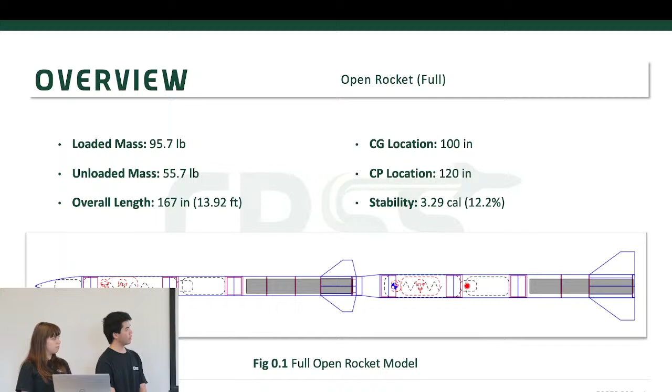Okay, here is our OpenRocket of the entire model combined. We have a loaded mass of about 95. Unloaded is about 55. It is almost 14 feet long. The center of gravity and center of pressure are over there. Stability is about 3.3 or 12%. And then let's look at just the sustainer. Loaded mass is only 43, unloaded 23. It's only about 7.4. This is roughly the size of the Encore rocket last year and has pretty similar specs to that. Stability is about 1.9, 10.8%.

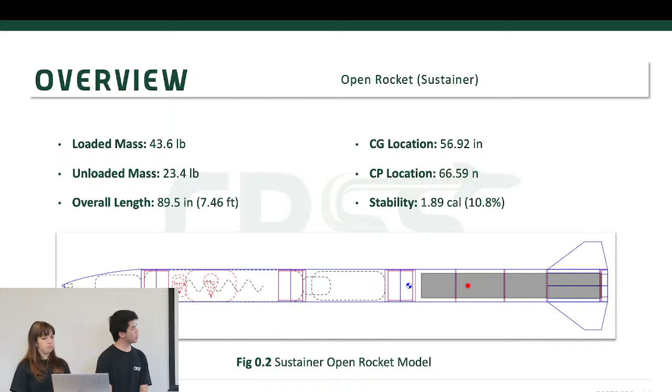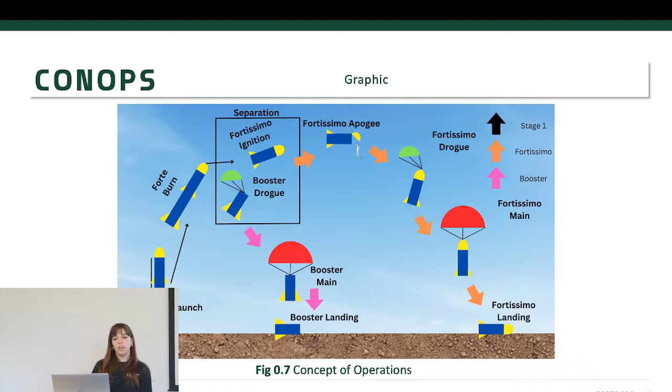This is our concept of operations. So we have several stages that I will discuss in more detail now. So first we have our launch phase. This will include integration of Forte onto the launch rail, the start of our video and data recording, and motor ignition and liftoff. Afterwards, the booster will burn till completion, and during this we will be receiving transmitted data on the ground. After that, phase 3 will be our separation. This is when our separation device will be activated and our booster and sustainer will separate.

After this, we will have two sequences happening at once. We'll have what happens with our booster and what happens with the sustainer. I'm going to first go over what happens to the booster. After it separates and the booster and sustainer drift apart, the booster will reach its apogee and coast to about 5,360 feet. Once this happens, the avionics will detect apogee and the drogue chute will be deployed.

After the booster reaches about 1,000 feet in altitude, the Tender Descenders will activate and deploy its main chute. And once this happens, the booster will land safely and start the GPS transmission so we can recover it after, and not walk through the desert aimlessly like we did last year.

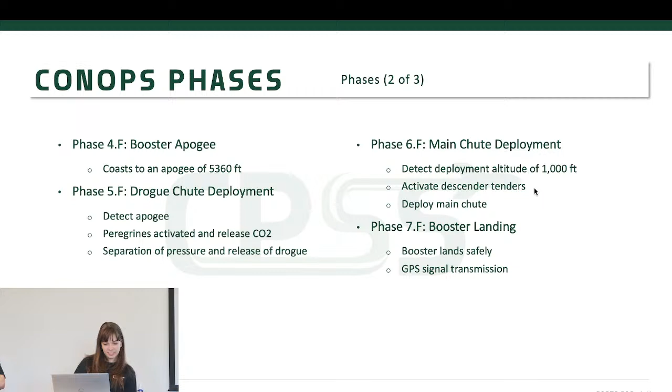And then while this is happening, we will have the sustainer also continuing its flight. It will have its motor ignition and burn, which will go till completion. While this is happening, we will still be receiving that transmitted data. After the motor burns, it will be in its coast phase until it reaches its apogee.

But right now we are predicting to be 20,682 feet. At this point, our water will deploy out of the nose cone as well. Once apogee is detected, the recovery will activate, the Peregrine will go off and shoot out the drogue chute. And then once again, when it reaches that 1,000 feet in altitude, the main chute will deploy before it lands on the ground and starts transmitting the GPS signal.

Okay, and here I'm going to talk about the requirements. These are all our top level requirements that are derived from the competition's list of requirements, and some of these, as you'll see later, are optional and get us extra points. So the competition is essentially a target apogee competition. You get more points if you are close to your apogee. It's a percentage of how close to your target you got. Our target is 20,000, and we've given it a 10% margin right now. So this is our primary objective.

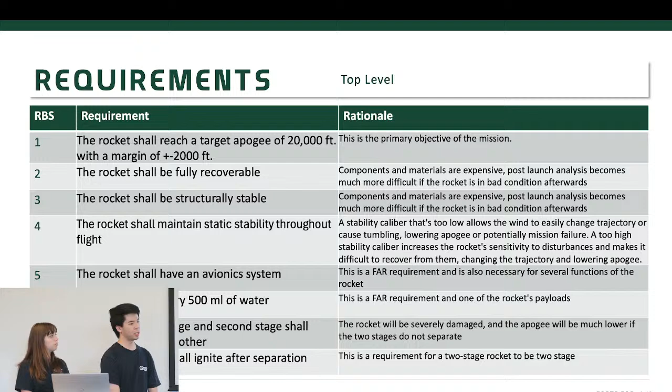Next requirement is that the rocket shall be fully recoverable, because we want to get scored. If your rocket is destroyed, you do not receive points. And we'll also destroy all of our stuff that we worked so hard on. We do not want that to happen. Going along with this is also the rocket shall be structurally stable. This is another requirement for the exact same reasons. We don't want to break our rockets.

Next, we have the rocket shall maintain static stability throughout the flight. This has to do with the stability caliber that was mentioned earlier, and we have set specific ranges for our sustainer and for our entire rocket that it's supposed to fall in, because too low is going to make it easier to push the rocket using wind or other effects. That'll cause it to not fly as high. Same way though, if the stability is too high, then it becomes more sensitive to disturbances, and it's difficult to change the trajectory once it's on a path that we don't want it to go on, then it's like game over.

Next, we have the rocket shall have an avionics system. This is another requirement from FAR, and it is also necessary for several of the functions of the rocket, including both our recovery systems and our separation. We need that to work as intended, and so we can get our GPS tracking telemetry.

We have the rocket shall carry 500 milliliters of water. This is a fairly new FAR requirement that we did last year, so we're confident we can do it again. But it is simply the water must deploy at or after apogee from the nose cone or another part of the rocket.

Next, we have the rocket's first stage and second stage shall separate from each other. This one is not necessarily a requirement from the competition, but we do get extra points like mentioned before. And we also have the second stage shall ignite after separation, and this is just a requirement for the two stage to not destroy itself. Yeah, that's about it for the requirements. Now we're going to move on to all the subsystems. I'm going to let Thomas and Bryant do the aerodynamics overview if there are no questions on the full scope so far.

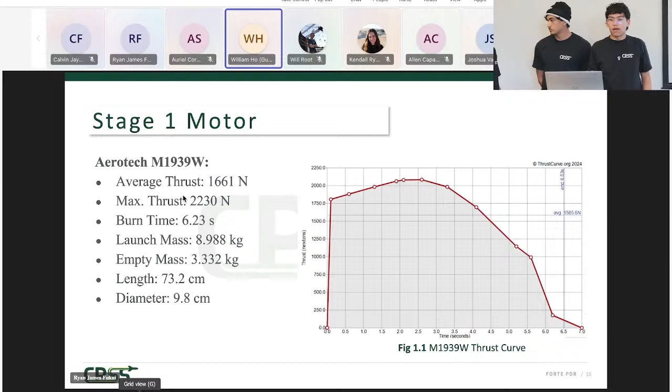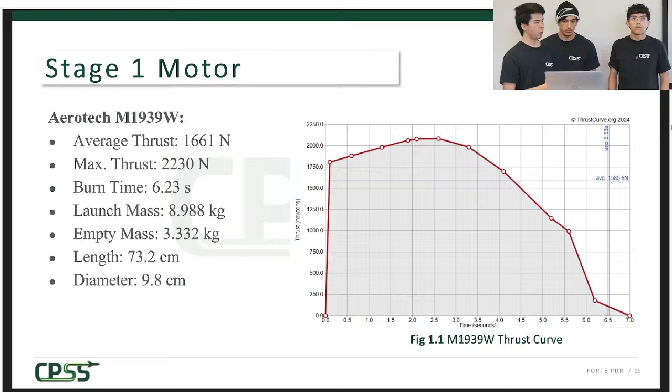Hey, do you guys have a project timeline and where you're currently at in the project, and I guess the next steps you'll immediately take after this design review? Yes, so each subsystem will have their own individual next steps. As for the project timeline, after PDR, we'll be preparing for CDR, which will be right when we get back from winter break, early January, second weekend. And then as soon as we're done with CDR, we're gonna allow subsystems to start ordering all their stuff.

And then by the end of January, hopefully we'll have all the materials we need. Up until May is all build season. In May we'll do another check-in with all the subsystems, a little launch readiness review, see where we're at before launch in June. The first weekend of June is always the launch date for the FAR competition. So that is our target. This is a one-year-long project, or we hope it's a one-year-long project. So yeah, that's our timeline.

There'll be a little bit about budget in each subsystem as well as an overview at the end. And that's about everything I have.

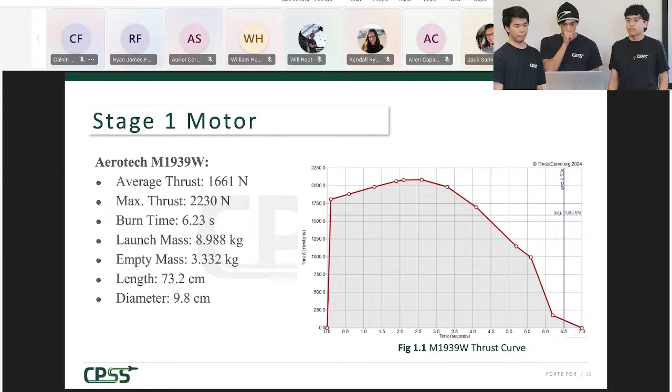Did that answer your question? Got it. Okay, thank you. Yes.

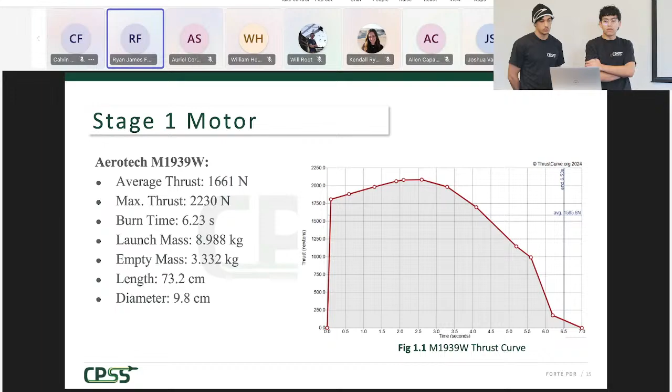Hi everyone, I'm Brian. This is Thomas. Let me start off with our motor selections. So for our stage 1 motor, which is our bottom stage, we have an Aerotech M-class motor. It has an average thrust of 1,661 newtons, a max thrust of 2,230 newtons, a burn time around 6 seconds. It's around 9 kilograms with an empty mass of around 3 kilograms, and then a length of 73 centimeters and diameter of 9.8 centimeters.

For our top stage, we also have another M-class motor from Aerotech. It has a higher average thrust of about 1,800 newtons, a max thrust of almost 4,000 newtons, which is also higher than our bottom stage. It has a shorter burn time of 4.5 seconds. The mass at launch would be 9 kilograms. The empty mass is around 3.5 kilograms. The length is similar, 75.1 centimeters, and it has the same diameter of 9.8 centimeters.

So moving into our flight simulations, we use three softwares to run our flight simulation: OpenRocket, RASAero II, and our own simulation within MATLAB. So firstly, we have our OpenRocket simulation. From here, we could see that our apogee was 20,682 feet. We hit a maximum velocity of around Mach 1.4, which is around 1,500 feet per second. We also have our respective acceleration values, and we hit apogee at around 39 seconds. For this simulation, it was just basic assumptions. We set the altitude for the launch site, which is around 600 meters, we inputted some wind speed, and then we used assumptions for temperature and atmospheric pressure.

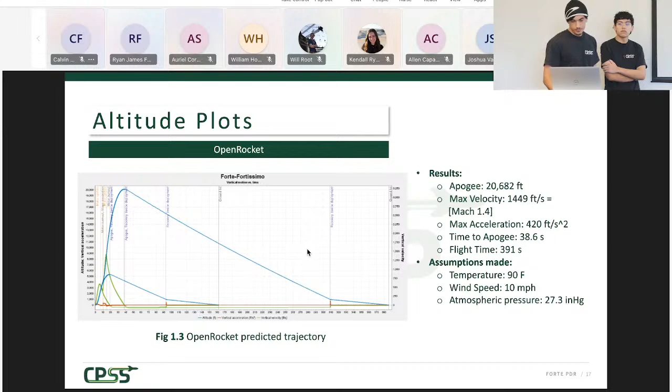So lastly, we have our MATLAB simulation. This plot is cropped. It doesn't have the recovery phase, just so it was easier to read. Here we have a slightly lower apogee of around 20,400 feet. It's good to note on this simulation, though, we had slightly lower expected velocity values. You can see our max velocity was actually Mach 1.3. That's something we're still trying to look into and figure out why that was the case. We also had a slightly faster time to apogee of around 37 seconds instead of 40 seconds.

For this specific model, we just used standard atmosphere, and this one had no disturbances, with 0 wind speed. Also, just a note on this plot, we used the drag data from RASAero. We're still looking into using the drag data from OpenRocket as well, to see how the two compare. Yeah.

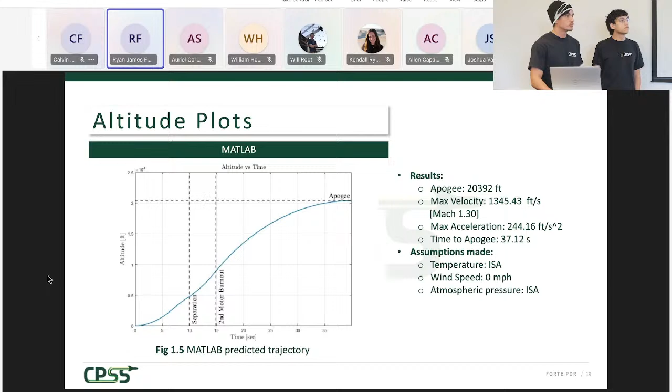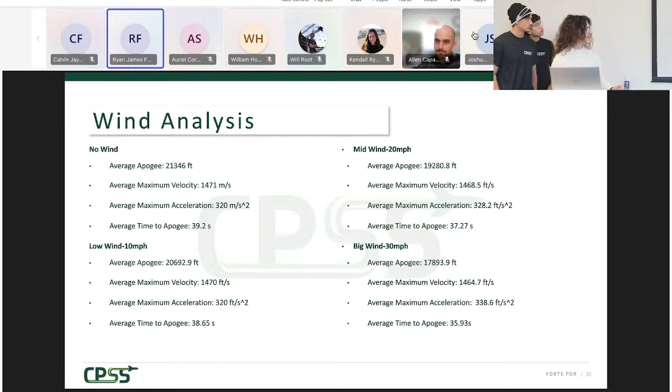Okay. Hello, I'm Juan. I'll be talking about wind analysis really quick. So, we've had a lot of updates to our OpenRocket in the past 24 hours. So we have no wind, 10-mile-per-hour wind, 20-mile-per-hour wind, and 30-mile-per-hour wind as kind of our frame of references for this wind analysis, and it also has a deviation of 2 to 3 miles, so it's in that range for each.

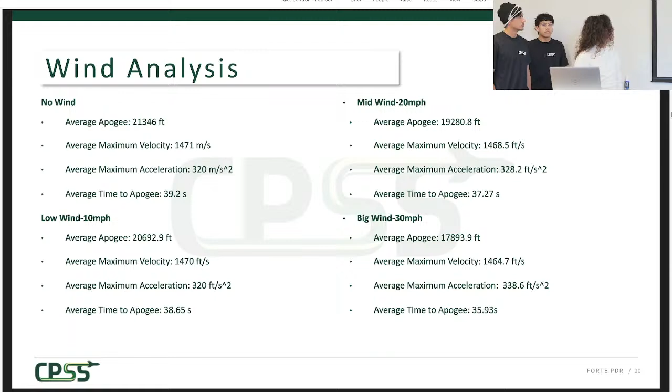So for no wind, we see that we hit 21,340 feet, which is very much within where we want to be. Low wind, we're still in that kind of range of 20,700. And then our 20-mile-per-hour wind and 30-mile-per-hour wind, we start to see that it gets a little dicey, especially with our 30-mile-per-hour wind. So yeah, some things to take into consideration that we get from this is, if a wind hits a certain speed, do we want to call it there?

Our safety limits on wind speed. Oh, I should know that off the top of my head, but I don't. I feel like it's, do you know? 15, 20 miles an hour, right? Somewhere in there. Okay. We launched at about 20 miles per hour last year. Yeah, it was pretty windy last year. And those are based on past years as far as weather. So we don't expect to launch in 30 miles per hour conditions. We just want to consider it anyway.

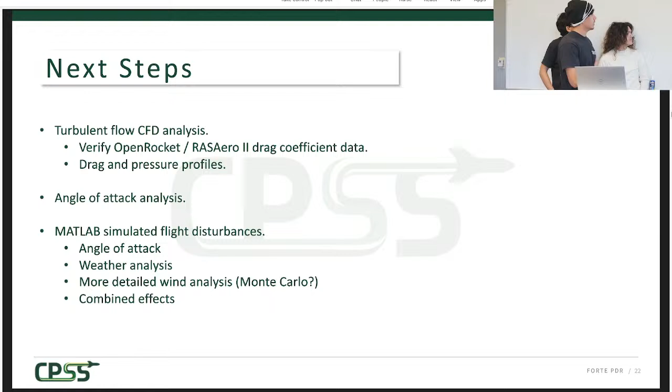So our current next steps, we want to have an in-depth CFD analysis to compare the drag coefficient data from OpenRocket and RASAero. We also want to get some drag and pressure profiles, primarily for the transition piece, which would be really nice data to have. And within OpenRocket and RASAero, we could do angle of attack analyses. And with our MATLAB simulation model, there's actually no disturbances, so we'd like to potentially add those and compare them to both OpenRocket and RASAero.

And then we'll be moving into the airframe design, and Connor's going to come up and talk a little bit about that. But before we move on, are there any questions about our aerodynamics section? Yeah, I have a few questions. Oh, is someone asking in real life? Yeah. Could you repeat the real life questions just so we can hear them too? Yeah. I was gonna ask about the...

Yeah, separation section. There is a separation section. It's mainly focused on the interface. As for the aerodynamic concerns, one of the next steps is looking more into the motor delay in between separation and making sure that works with our models, because we chose a 3-second one. We were working with OpenRocket and designing to apogee, and then we have to troubleshoot and make sure that still works physically. Do you have anything else about that?

Are you guys looking at getting documentation on the Ajax rocket? Yes, we did. That was one of our most referenced documents throughout the year. One of the things that was really interesting was that you were able to do a test motor fire before launch to get the actual burn time compared to what the spec sheet says. But we are concerned with budgets, and the motors are quite expensive now, so we are a little worried about not being able to get that important data.

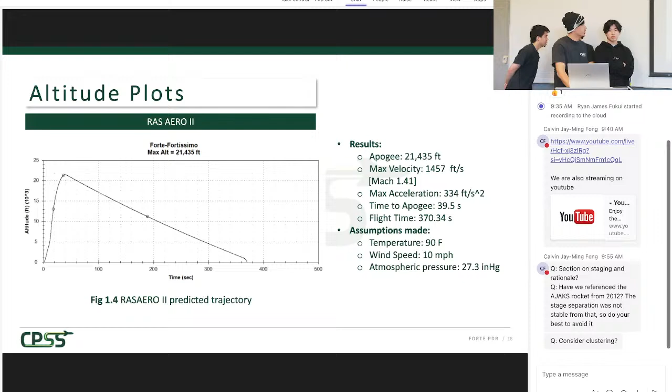In terms of RAS Aero, I'm pretty sure they have a good supersonic flight regime for modeling. But in terms of our MATLAB simulation, we don't really have anything along those lines. It's just simply the original equations of motion from the ODE. Yeah, that's also why I wanted to do more CFD analysis. I think that would help a lot with that supersonic region and getting more accurate drag data around the rocket.

Okay. And then, talking more about MATLAB and this simulation. What are the assumptions made there, and how did it change from last year to this year? The main thing that changed was previously we were only updating the density of the air from the standard atmosphere model. In this model, we're pulling density based on our Mach number now too, to try to gain more of that compressibility information. Also, because the rocket is varying diameter, we had to incorporate that as well because the areas would change.

And then, are you guys modeling the stage separation also? I assume you just decrease the mass for the upper portion. Yeah, obviously we updated the masses and all that throughout the simulation. So we have two burn ODEs now. Got it.

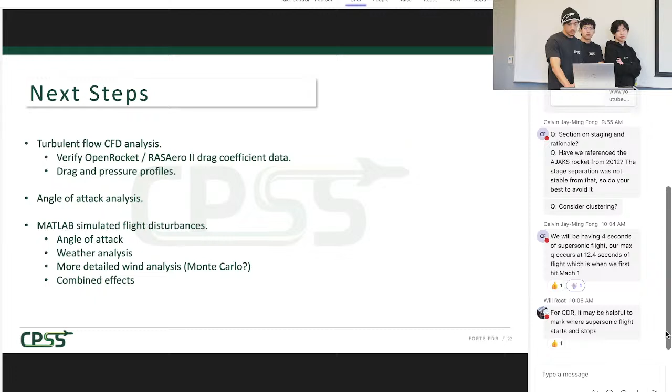Hey guys, it's Jack. Can you guys hear me? Yeah. Cool. So I just want to say great job. It's super exciting to see the two-stage rocket in the club now. So really good analysis so far. You guys did awesome. I just had a couple really brief feedback points.

So could you go back to the RASAero data? Okay, cool. So you simulated that with 10-mile-per-hour winds. At what altitude was that? Was that sea level or at launch altitude? 2,000 feet, yeah, launch altitude. Okay. And I saw you guys did the wind prediction as well. Could you go to that really quick too? Okay, cool. And is this at launch altitude winds, like surface level winds? Yes.

Okay. So the one thing that stood out to me a little bit is with a 20,000 foot apogee, you're going to get some pretty significant upper level wind shears, in my opinion. I've never been in a club where you guys have launched over 10,000 feet. I've only worked on, you know, Crescendo and other rockets that go up to 10K.

So my first thought is maybe you should do a little more research into how upper level winds affect the flight profile. I think it'd be worth looking into taking in some weather data from NOAA or other sources and trying to develop a very rudimentary wind model in order to better predict that apogee. So that's one thing with high altitude rocketry you should look into a little more. Might be worth more time in future work for the project. Nothing really stood out to me in terms of technical. Does that make sense to you guys?

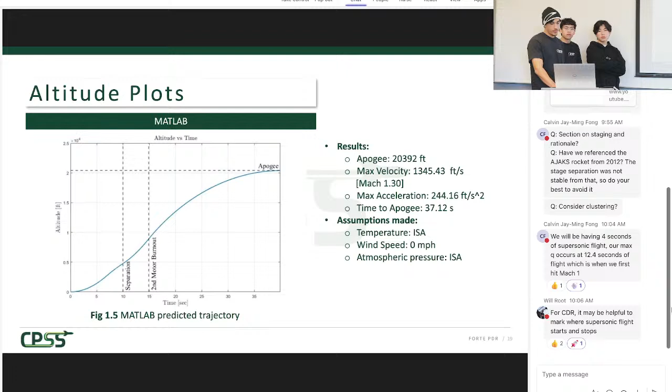Yeah. Okay, cool. And then could you go to the MATLAB apogee versus the OpenRocket apogee? What were the differences there? So MATLAB apogee was 20,392 feet, and our OpenRocket was 20,682. So MATLAB was a little bit lower. Okay, gotcha. That looks good.

That looks awesome. Going off of what Will said too, the optimization for the different motors, the first thing that stood out to me is my intuition was saying we should have a more powerful motor for the first stage and a less powerful one for the second stage. Going off of what he said, you might be able to optimize the design a little more that way.

So maybe do a little more research into, if we have a heavier motor for the first stage, you can save a lot of weight, especially on the coast phase. You'd be carrying a lot of dead weight, even though the motor's burned out. The bigger motors just have a higher dry weight, so that could help you and optimize even cost as well, like he said. So that could be worth looking into. And could you repeat, did you look into other alternative designs with a higher power motor for the first stage?

Yeah, so that was our original configuration. But when we were looking into higher power motors on the first stage, we ran into sourcing issues where we couldn't find specific configurations that were available. So then we moved into just using two of the same class. And also, as Ryan mentioned, they're cheaper. Also for our bottom stage, our main consideration was burn time. The one we chose had the longest burn time out of all the other N-class motors we've seen. So that was another consideration when picking those.

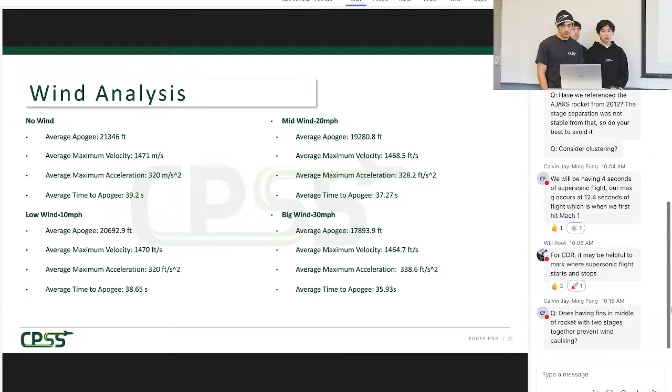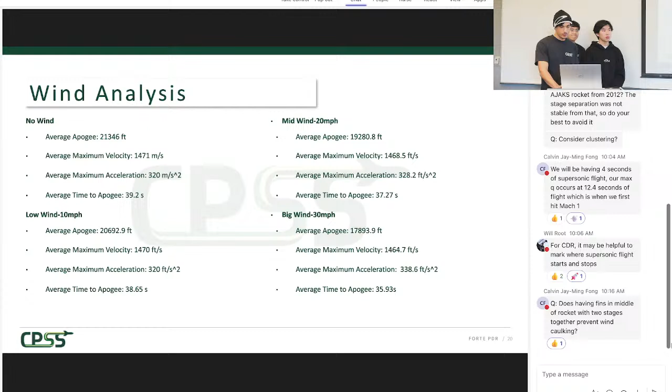I sent you a little snippet of what I did for a PSET the other day. I think you guys saw that, but yeah, I think it would be a good idea to make your own algorithm once again that can gauge the severity of wind cocking. And if you guys have any further questions, you can give me a personal call about the code that I sent. But yeah, I think it'd be good to develop something on your own once again and validate the results you guys are seeing from these softwares. Yeah, for sure. Any more questions?

I was just wondering one more thing real quick. Just out of curiosity, for this stage separation, did you all model a certain delay for that? Or how does that work? Yeah, in OpenRocket, all the simulations are modeled after a 3-second delay. Okay, and that's what you plan to use? Yeah, and separation occurs at burnout. Gotcha. Cool.

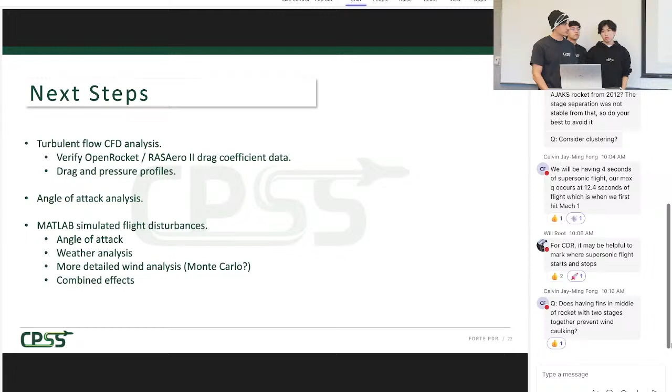Okay, so now we're just gonna move into the airframe design. So I'm Connor. I'm gonna be going over the airframe design, and this is the overall model of the rocket that you saw in one of the previous slides. For the nose cone, we're going to be using a Von Karman Haack series with a length of 13 inches and inner diameter of 5 inches, a wall thickness of about 0.08 inches, and a neck length of 2 inches. Something to note is that on the figures, there's an internal neck shown, but it's actually going to be an external neck.

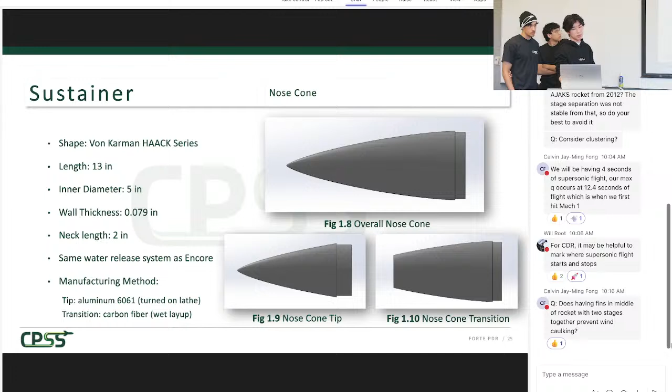And then it's going to be the same water release system as last year's rocket Encore, where once it reaches apogee, the rocket is gonna rotate and the tip's gonna separate from the transition and release the 500 milliliters of water. And then for manufacturing, the nose cone is going to be made with 6061 aluminum on a lathe, and the transition is going to be made with a carbon fiber layup. The question was, how hot is the nose cone tip going to get? There is analysis for that in the structures section. Yeah, so stay tuned.

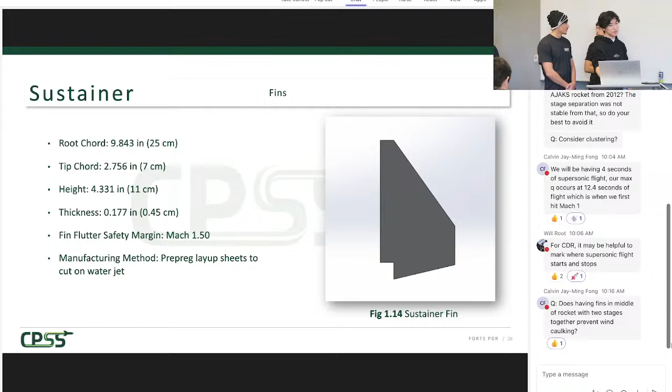For the stage transition, the length is going to be 6.6 inches. The forward inner diameter connecting the sustainer is going to be 5 inches. The aft inner diameter connecting the booster stage is going to be 6 inches with a wall thickness of 0.12. And then the neck lengths are going to be 2 inches on the recovery side and 1.6 inches on the separation side. And this is also going to be made with carbon fiber wet layups.

And then for the... That should be 6. Yeah.

For the booster body tubes, all of the inner diameter is gonna be 6 inches. The wall thickness is gonna be 0.12 inches, and the recovery and avionics tube are gonna have a length of 18 inches, and the motor tube's gonna have a length of 32.5 inches. And then they're gonna be manufactured the same way as the sustainer body tubes, where the recovery and motor tubes are gonna be made with carbon fiber prepreg, and the avionics is gonna be made with fiberglass wet layups.

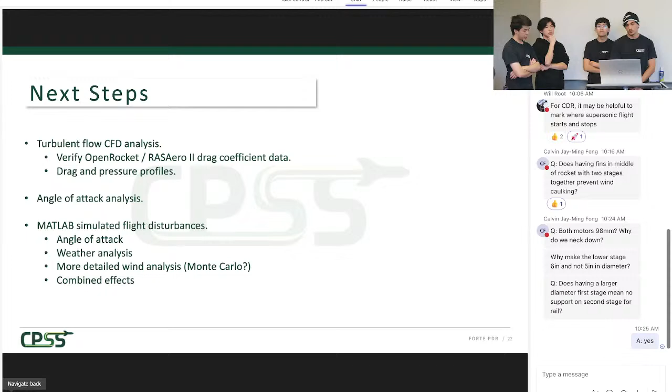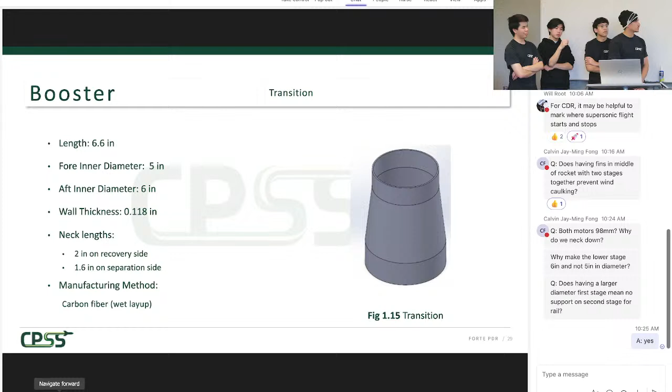Sorry, real quick. I had a question on the booster fin flutter Mach number. Looking at your graphs from the simulations, you might be exceeding that number at separation or leading up to separation. When I looked, Mach 0.7 was the max that the first stage would reach, because after they separate, that's when it accelerates and gets like Mach 1.5. Okay, I was just trying to read it off a graph. Sorry, it was a little unclear in the picture. That was just a concern based on what I saw, wanted to check. Yeah, thank you. Based on it, it was like 0.7.

The safety margin's about 15%. So the real Mach, like the fin flutter becomes a concern at like 1. So our safety margin of 0.86, and then with our fins only reaching like 0.7, we felt comfortable with that. Yeah, that sounds good.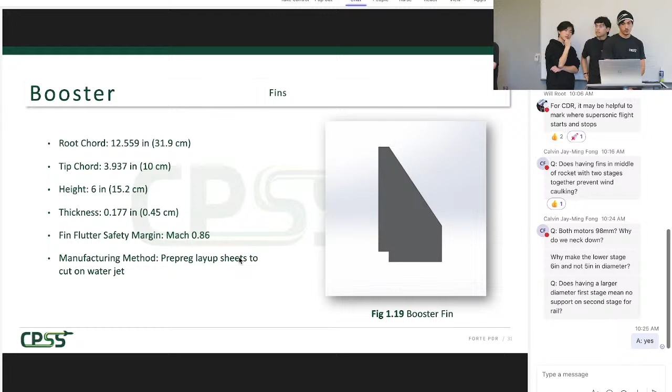Thank you for pointing out what the number is from the graph. Yes. Again, I was just doing my best to read it, and having you guys confirm what it is helps a lot.

Okay, now we're gonna be moving into structures, so, Kendall, or just Calvin. Kendall's online. Oh, okay. Yeah. Calvin's coming up. Thanks, aerodynamics. Hi guys, I'm Calvin. Kendall is my co-lead and she is online right now. She couldn't make it in person, but we will be going through some structure stuff.

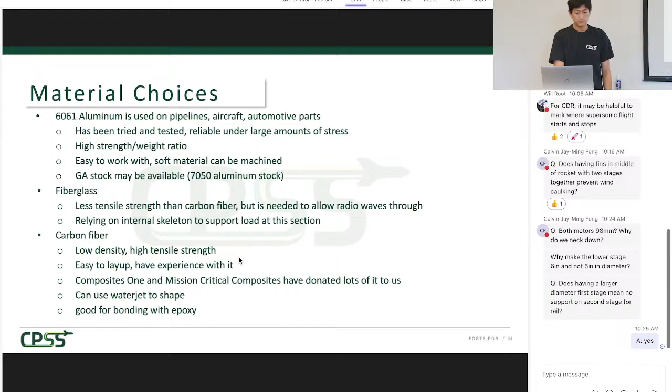So first off, general materials overview, we're using 6061 aluminum. That's what we've been using in the past. It's reliable and easily manufacturable, which is what we care the most about because we will be making our parts from scratch. Also, there may be some 7050 aluminum stock that we have in the shops. That would be very helpful for us, and we will talk about that more later because aluminum is expensive.

We will also be using fiberglass for our avionics body tubes because that's what's required for signals to get through. And at this point, our fiberglass is significantly less strong than carbon fiber. So for the second stage, we will have to rely on the internal skeleton to support that load in that section, and we will get into that as well. With our carbon fiber, there's a lot of pros, not a lot of cons. And now that we've been able to water jet the past couple years, it makes it a lot easier for us to make pretty precise shapes out of carbon fiber, as opposed to sloppy layups that might happen. So yeah.

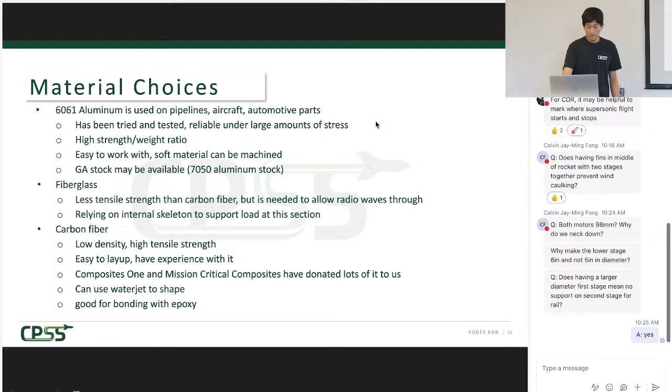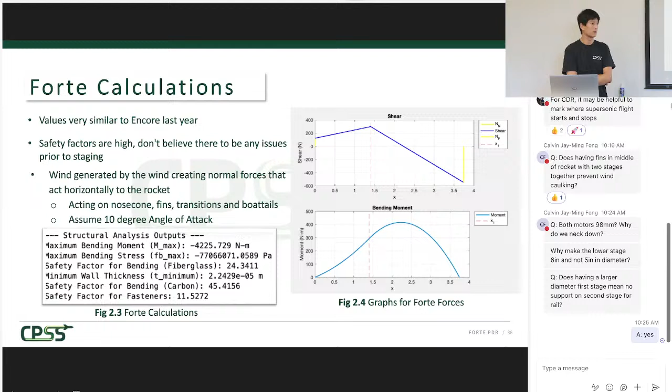I mean, factor 12 is still pretty high, like, what is the margin of error on load, what's driving your low confidence in this thing? I think safety factor of 12 and 6 is still very high. Oh, sorry. The question was what's driving our concern, because our safety factors still look pretty high on our calculations, and that's not taking into account carbon fiber at supersonic speeds. And we know carbon fiber can flutter at high speeds, so we're worried about the structural integrity of that when it's going Mach 1, because we haven't sent our carbon fiber anything past Mach 0.9.

I'd also like to add that these safety factors are specifically for bending moments, and we still have a lot of other significant calculations on the forces on the body tubes. This is just accounting for its bending moment and not other factors yet. Yeah, are you planning on doing some sort of combined loads analysis, before CDR? Yeah. Okay. These were just initial numbers that we wanted to get first, especially because our rocket is so tall this year.

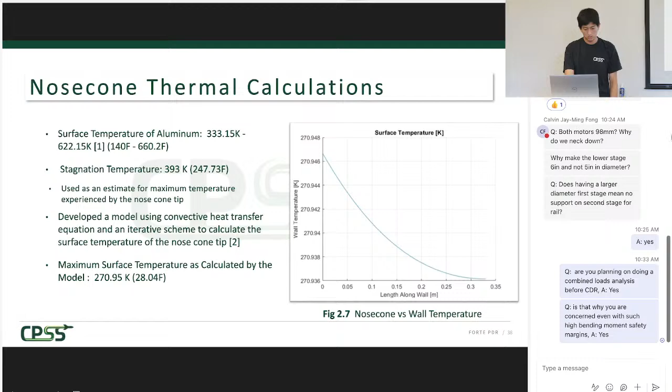Ajax, thank you, Calvin. And so just quick clarification here, this is like stringers on the inside of your airframe. This is not a separate structure. So will they be bonded into the airframe? Or how are these rods going to work? Are they going to be like a skin and stringer type analysis, or? Here, I'll go to the next slide. I think that might help clarify.

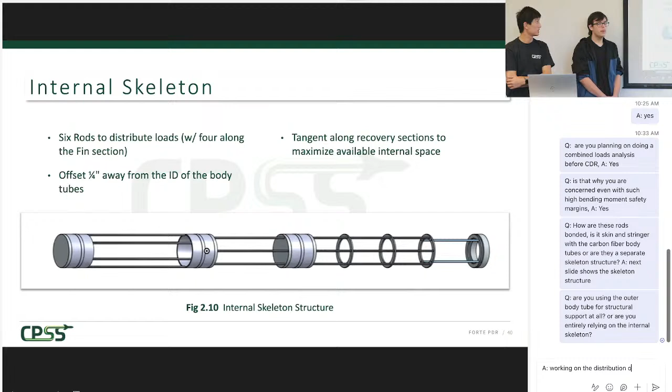Yeah, so for most of the skeleton, we're using 6 rods along the motor section here and the avionics section here, but we had to go down to 4 down here because of the space required for the fins. And those are all offset about a 1/4 inch away from the actual body tube. And the one exception of that is the recovery.

Oh, sorry. Sorry, tech issue. The exception of that is the recovery section because we are going supersonic. We're trying to give recovery as much space for the parachute as possible. So those are actually going to be tangent and secured, partially with epoxy, to the actual body tube.

Another question here is, where is the load from the motor actually being translated into the airframe? Is that going to be at the aft enclosure, or is the load going through the forward enclosure on the airframe? I am not sure, being honest. You said the load from the motor? Yeah, so where's the actual thrust from the motor reacted on the airframe?

Typically it's been just on our bottom bulkhead, and then by attaching those rods to these centering rings, we're hoping it will get translated upwards as well. But at the same time, we're worried about the forces coming down on the rocket because the drag forces will be very high. And to add to that, the blue tube holding the motor casing is going to be epoxied to the centering ring. So it's mainly the centering rings and that bulkhead that are taking that force.

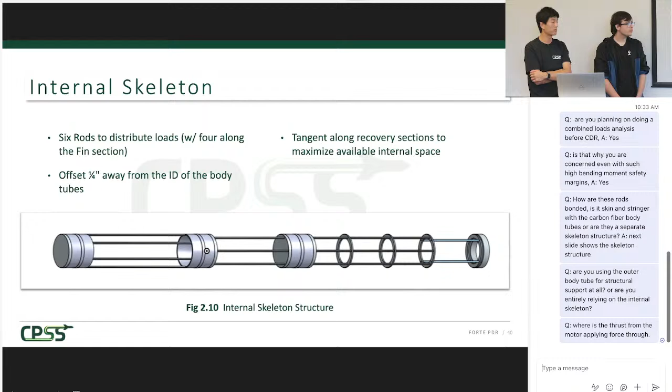All right, so just to go a little bit deeper into the centering itself, I already mentioned we're going to go to 4 rods for the sections. The rings are about 7.5 inches apart, and we have the separation plate here, which is also going to be our motor retention plate. And this ring right here is the one that's going to transition between 6 and 4, although we're looking into potentially changing that.

Just to clarify a little more on the transition to the 4 rods, we did that because we're going to have 4 fins, and we have concerns about our fins flying off because there's very little room between the exterior of the body tube and the motor mount tube. So by having these rods align with the fins, we're going to find ways to either epoxy the fins to the rods or have a more secure bolt-type attachment to secure the fins to the rods themselves. We think that's going to help our fins structurally as well.

Did you consider doing a fin can for the bottom section instead of having them go through, either by laying them up with the actual body tube section or locking them into the body tube section somehow? In terms of our fin retention, that is our next step for CDR. We've considered a few ideas, but we're still uncertain which direction we want to go.

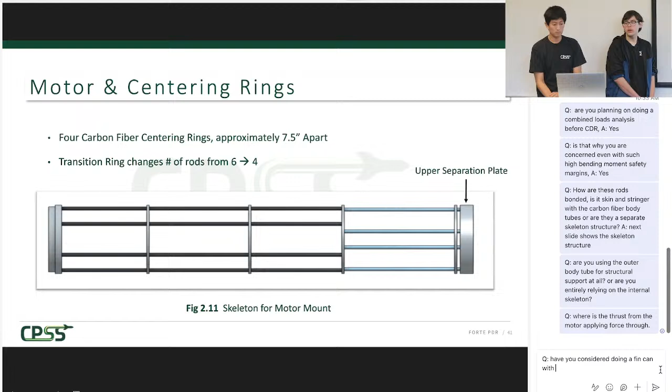This is bugging. Yeah.

Did you consider any other materials like Delrin, plastics or phenolics, instead of aluminum, to cut down on cost? We did not, but that's definitely something we should consider. Also, Delrin's probably a lot lighter than aluminum, right? So that'll help. Do we know how to work with that stuff? We know how to do all the aluminum. We've done acrylics for an avionics section in the past for Crescendo. Water jetting worked. Other plastics can be laser cut a lot easier. Delrin comes in sheet, that's what makes it really good for applications like this.

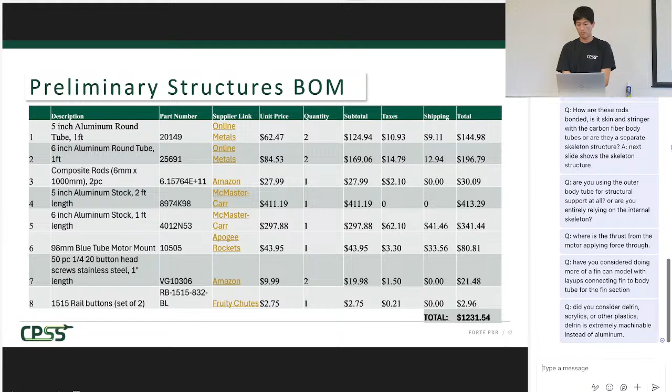Yeah. Well, first, that was not the end. There was more: a risks and concerns section and next steps. And then a whole section on all our different testing at the very end. But I'll let Calvin get back to it. Yeah, so we have some next steps too. Sorry, I totally forgot about those.

So yeah, as far as risks and concerns, from last year, we still haven't figured out a good way to get our holes 90 degrees apart on our couplers and bulkheads. So that's been an issue again. We used the 90-degree offset on the mill clamp and it wasn't 90 degrees. So finding a good way to do that, maybe just 3D printing out a jig.

The even distribution of our carbon fiber rods is going to be important because we are kind of worried about that 6 millimeter diameter, and there's no way that we can account for the rods to take 100% of that load if they had to. So making sure that the rods are evenly spaced, even in length as well, is going to be important for us.

Safety factor of our internal skeleton, we don't currently have one. Our safety factor was just assuming that we have max velocity and max acceleration at the same time, which isn't going to happen. Testing the strength of the internal skeleton, and then the natural frequency of our fins, because those will definitely flutter, and fin retention, which we mentioned, and budget as well, because we are running at a high budget right now.

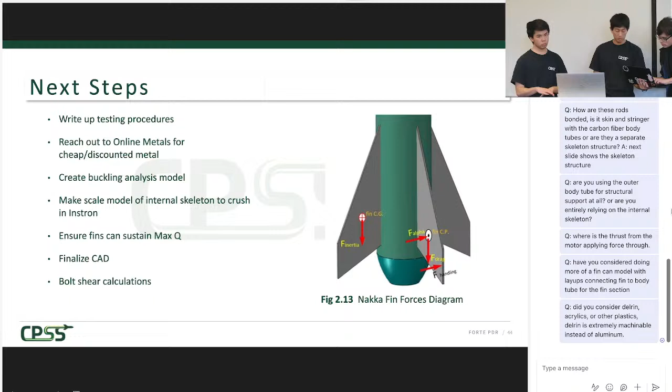Got it. And sorry, so you wrap it around the outside, and then between the mandrel and the inside part? Sorry, what was that? The inside release film, is that what you're talking about? It still does need release film on the inside. It's just that now we only need one release film each layup instead of two. I see. And you're going to use the release film you already have? Yes, or source more. I don't think we can use the quote unquote crunchy green one, or actually it might still be enough pressure, but we'd have to check.

We're going to do testing on that because we haven't used the tape before, so we'll do test parts before we actually try. But the plan is to use the release film we already have or try to get more donated. We did get some donated at the end of last year, but I'm not sure if it's perforated or unperforated. If it was perforated, we would not be able to use it. It should be unperforated, but when I looked, it didn't look unperforated, so they might have sent us the wrong one. We still have to look into that. Got it. Does that answer it? Yes. Thank you.

Will, did you also see we have the weight input in the chat? Got it. Okay. Ethics.

Oh. Yeah. We're gonna be starting, so quiet, please, or whisper at least.

Sorry, Metztli, go ahead. Okay, hi, I'm Metztli. I'll be talking about the recovery system. So first and foremost, I just want to talk about why I'm kind of just reusing the recovery design from last year and the year before. So it's the same recovery system we use for Encore and Crescendo. And there's like three main reasons why I decided to do this.

First and foremost is cost has been a really big issue this year. If we reuse the same design, we have a lot of reusable parts we can use, so it'll save a lot on costs. Second of all, it's a pretty reliable system at this point. We've used it 2 years in a row pretty reliably, and in a rocket where there's a lot of unknowns because we've never done a two-stage before, it's pretty important to be able to mitigate a lot of things that can go wrong. And if we're using something we're familiar with, then things are less likely to go awry.

And finally, it was just really easy to adapt from a single stage rocket, which is what we've been doing, to a two-stage rocket. So there wasn't really any concerns about it being difficult to integrate into a two-stage, and it just has minimal conflict with other systems. It's not a design that structures, separation, or avionics really has to worry too much about, because it's pretty easy to use.

So what would this design be? Well, on the booster stage, you can see right here, it has a drogue chute, a main chute and its bag, a bottom coupler, peregrines, which kind of stick through the bottom coupler into the avionics tube. There are tender descenders that connect with the shock cord to that bottom coupler. The body tube is the main part there. There's a shock cord, and the top coupler, which on the booster stage is right on top of that top coupler, will be the separation system. So our recovery system is essentially right under that separation system.

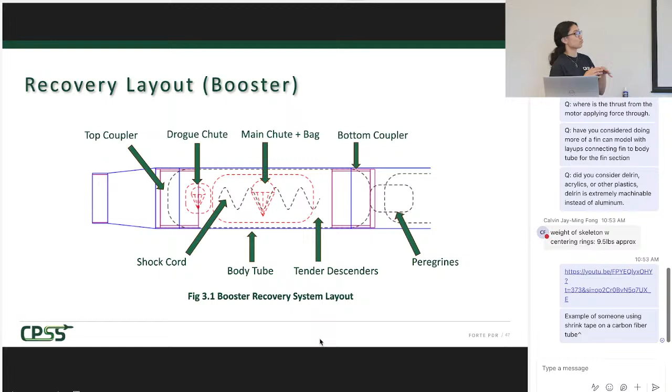And then for the sustainer stage, it's kind of the same thing, except the top coupler now has the nose cone on top of it. There's no other system or whole other rocket on top of it. Okay, this is the outer profile for both the booster and the sustainer. They both kind of look the same. Essentially, what we're working with is a pressure vessel that'll be created from a carbon fiber body tube and aluminum couplers. There's going to be an interference fit between the couplers, bulkheads, and body tube. In the booster stage, the transition rests on the lid of the pressure vessel, and in the sustainer stage, it's a nose cone on top of it.

There will be through holes on the bottom bulkheads. It's going to require 2 through holes, one for an eye bolt, which will be secured with a backing located in the center of each bulkhead, and this eye bolt is essentially what we're connecting the shock cord to. And then there's going to be one small hole that will allow wires to connect from avionics to our recovery parts, namely the tender descenders, because the tender descenders are not sticking through the bulkhead. It's only the peregrines that will be.

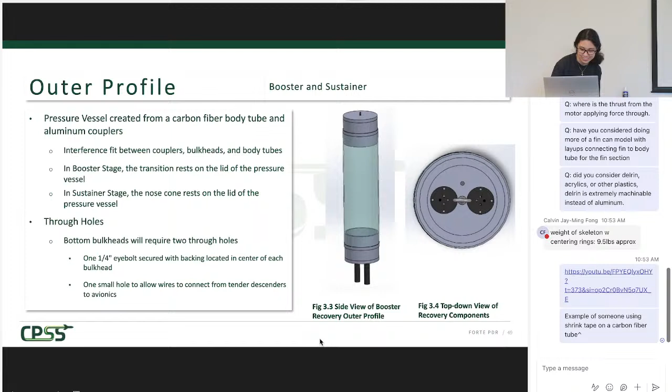Okay. So this is the first of our internal components. They're the CO2 peregrines. We'll be utilizing peregrines from Tinder Rocketry. They're going to be placed around the eye bolt, and they're going to be sticking through the bottom coupler. We're going to be using multiple for redundancy, probably 2. They're used to release the drogue chute at apogee.

Essentially, what will happen is when avionics senses apogee, the CO2 will fill the pressure vessel. They're going to send a signal that'll set off the black powder in that charge cup. If you can see it there, there's a charge cup and there's black powder in there. It'll set it off, and that'll puncture a hole in the CO2 canister, which will allow the CO2 to fill the pressure vessel, and the resulting pressure is going to pop off the top coupler and force out the drogue.

As for the tender descenders, we're also going to be using these from Tinder Rocketry. They're going to be placed in series and attached to the shock cord between the eye bolt and quick link. The point of these tender descenders is to keep the main chute in the body tube until we want it to release, because the main chute is not supposed to go off until like 1,000 feet after the drogue chute goes off. So again, we're going to be using 2 of them per stage for redundancy.

That's 4 tender descenders total. We already have 2 in the CPSS cage, so that saves us some money. Black powder within the tender descenders is going to cause the quick links to separate when we decide to release the main chute.

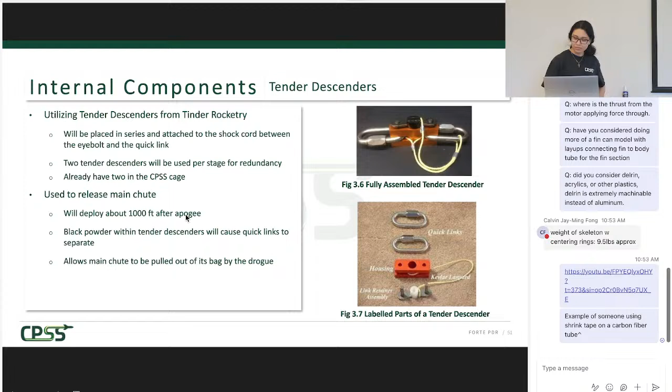Okay, and then this is just internal components related to altimeters and other related avionics. They're going to be using an egg timer that'll be connected with CO2 canisters and programmed to sense zero velocity, which is our apogee. They'll be connected to the tender descenders and programmed to sense when we're 1,000 feet off the ground, past apogee. And there's another avionics system they're making that'll just serve as the redundant system. We also have E-matches, which will be used to ignite the pyrotechnics, and those are going to connect from the tender descenders and peregrines to avionics.

Okay, so for some recovery calcs for the booster stage, we're going to be reusing our drogue chute and main parachute from last year. So that's a 36 diameter drogue chute and a 120 diameter main chute. We're also going to be reusing our shock cord, which is made of Kevlar. The landing velocity we calculated using an Apogee Rockets equation is about 14 feet per second, which is well below the 15 to 20 feet per second that's recommended for landing velocity. I tested it to see if the weight were to increase by about 50%, if our landing velocity would still be safe, and it would be around 17 to 18 feet per second.

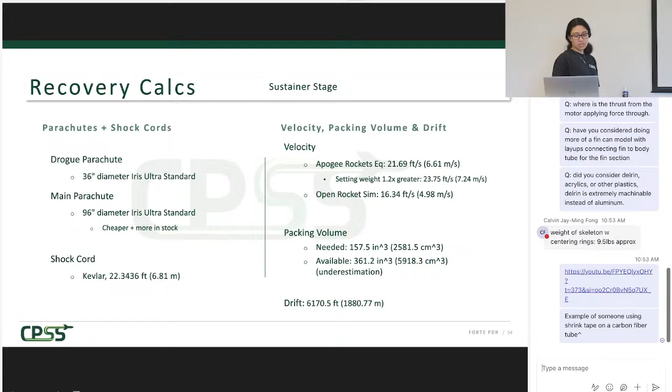And the OpenRocket simulation kind of agrees with these numbers, saying that our landing velocity would be about 14 feet per second. As for packing volume, we have more than enough space. We need like 260 cubic inches, and we have about double that amount. And then we also calculated drift. There is a drift of about 2,500 feet, which I think is pretty reasonable. That was assuming like 5 mile per hour winds. What's the apogee for the booster stage going to be? Yeah, around 5,000 feet, more or less.

Okay. For the sustainer stage, we will probably be using a 96 diameter main chute just because it is cheaper and it is more in stock. We're still going to be using the same kind of shock cord and the same kind of drogue chute. With the smaller parachute, we do have a slightly faster landing velocity. As you can see with the equation, we're getting about 21 feet per second, which is a little higher than the recommended 15 to 20, but not quite enough to be concerning. If the weight were to increase by about 20%, we'd be up at around 23 feet per second. The OpenRocket simulation seems to be giving a lot lower landing velocities, which is interesting. I'm not sure why. That might be a good or a bad thing, but it was giving around 16 feet per second.

In terms of packing volume, we're also still fine. We need like 160 cubic inches, and we have, again, almost double that. Drift is a lot higher because obviously the rocket is going up a lot higher. The drift here is about 6,000 feet. I will say it might be one of the benefits of having a slightly higher landing velocity. The rocket will not drift as far, because 6,000 feet is kind of a long distance to travel to recover the rocket.

Another question here, more for the structures team. It looks like you have double the volume that you need for the recovery system. Have you made that trade to shrink the volume of the recovery tubes to save some weight there? So not exactly yet. The initial design, when I was saying that we were not sure about the volume, that was before a change was made with the coupler bulkhead. The way those used to be, if you remember, the middle of the coupler was the wall of the pressure vessel. But now, since we're only using the same coupler design and the bulkhead's on the bottom, it gained 2 inches on top and 2 inches on bottom of volume space. So we could do that trade now to see if we can shrink that and see how that affects our weight and apogee. Yeah.

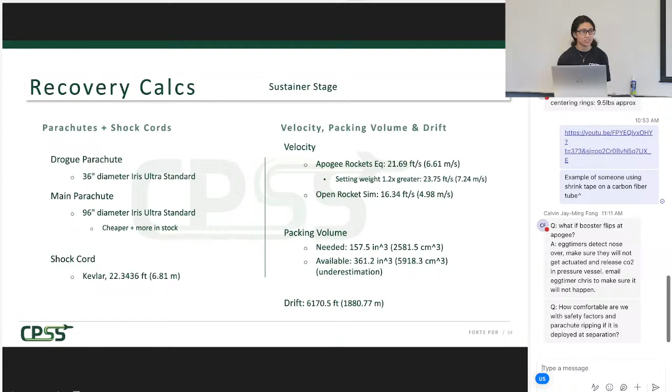Okay, for the people who probably couldn't hear that, the egg timer is based on apogee, not the velocity, so it should be 1 second after reaching apogee. Is that right? We should check whether the egg timer considers orientation in its consideration of altitude, in case it flips. I would expect not, because it's a barometer. Yeah, so I think we're okay. The egg timer is a barometer, so we do not need to worry about orientation being an issue and getting a false apogee or decreasing apogee, since it's based on pressure.

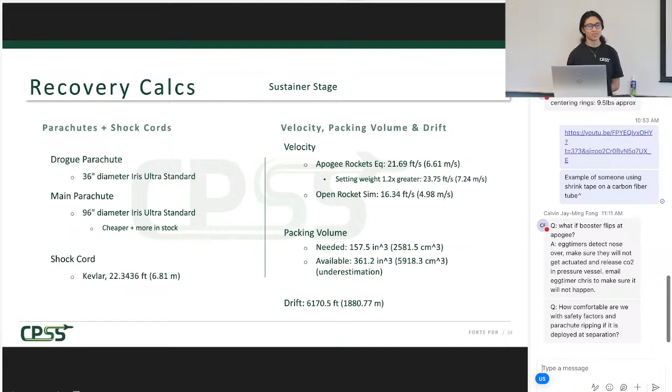We're gonna stick with Fruity Chutes and their ripstop nylon. Again, they're lightweight. Because it's ripstop, it'll resist tearing and abrasions better than just standard nylon parachutes. They're elastic, they'll absorb shock. And Fruity Chutes in particular have a very high coefficient of drag at like 2.2. So Fruity Chutes parachutes in particular are just a really good design and material to go with.

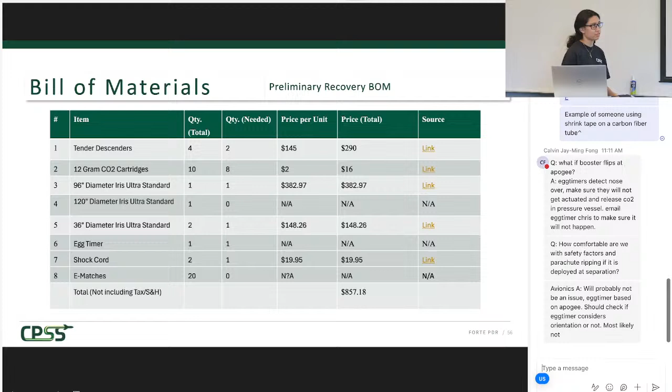All right, this is our bill of materials. Like I said, the whole point of reusing the recovery system from last year was to save on material costs. So you'll see on here there's a quantity total and then a quantity needed. For some of the stuff, we don't even have to buy it because we already have it in the cage. So the total cost, accounting for things we already have, is about $850.

The points of concern, like we were talking about earlier, the supersonic effects on parachutes are our biggest concern. Parachutes on supersonic rockets tend to have a higher tendency to rip, especially if something goes wrong. It's not going to be withstanding those forces at those high speeds. I'm not entirely sure if the tendency of parachutes to rip is caused by improperly timed deployment, or some weird stuff that has to do with the changes in air pressure or the forces that occur when you're going that fast. But we are gonna have to try to get more research on that. Hopefully it's just improperly timed parachute deployment, because if so, we can work around that.

Zippering's another slight issue. Again, if the recovery system deployment is improperly timed, then the Kevlar shock cord can do some major damage to our body tube. And this will be enhanced if it occurs during the sustainer stage specifically because of how fast it's going. And then there's just some slight concerns with integration.

I am a little worried still about how separation might impact the pressure vessel, just because separation is still being developed a bit, and it has all the rods and stuff, and it's right on top of us. And we just want to make sure there's no interference between the two.

And weight changes might also be a slight problem because, as you would recall, we're already going kind of fast for the landing velocity for the sustainer stage. And if that weight changes to be more than 20% higher, like 50% higher, for example, I'm not sure I'd be comfortable with the landing velocity. At that point, we'd have to start thinking about changing parachutes and readjusting how much space we need in the tube and all that stuff.

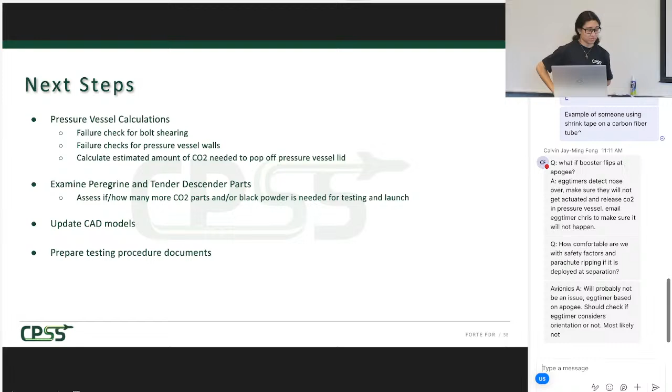Kind of a question both for avionics and for recovery. Have you thought of any contingency plans if either booster sep or stage sep, or nose cone sep, doesn't occur? Like, will your avionics know not to fire the second stage motor if you don't hit stage sep, or will you just blow a... Yeah, that's what I would be worried about too. If for some reason, like friction or something, stage sep doesn't happen, and what the consequence of it would be.

Would it be safer to blow a hole in the booster so that you could possibly recover the upper stage? So is that parachute sized for both? I believe so. I think the separation and the recovery are different systems, if I'm not mistaken. So the failure of the separation would not cause a direct failure of recovery, as long as we can sustain a hot fire separation of just blasting straight into our separation plate that will be talked about, which is one of our redundancies for separation.

It is held on right now by shear pins. It'll be talked about in just a moment. But yeah, it is essentially two different things that are happening. So the recovery would not be directly influenced by that, is the goal.

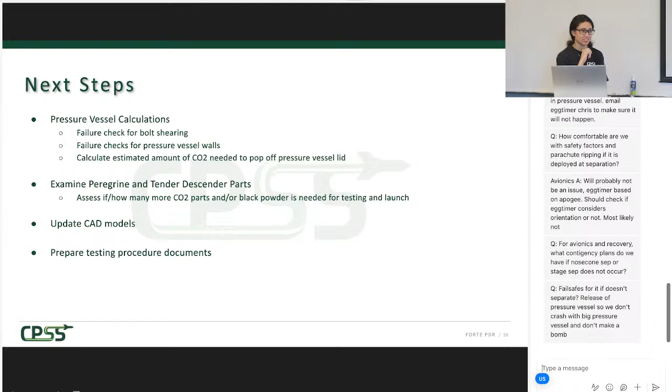We usually do drill some small holes in it. We have traditionally for the past few years. We also have that hole for the Tender Descenders, so some gas can escape from there as well. So hopefully that'll calm it down a little bit. And that can be a pretty simple calculation too. Yeah. If you have your starting pressure and a squared orifice, you can calculate if you want to bleed out all of your pressure in like 10 seconds or whatever of recovery. You can have them all empty.

The question was if we considered releasing pressure in the case of a ballistic recovery, so we are not dropping a pressure vessel from thousands of feet up. And the answer was that there are essentially holes that should hopefully allow the pressure to release, and we can do calculations to make sure that it will release by the time it reaches the ground.

Yes. Yes. Yes. Any intentions, like testing, to make sure that it is still suitable to be reused? Yeah. The exact shock cord, we can buy more. It might have been misleading, but we do buy more shock cord. It's just the parachutes are being reused, and we could do the same thing, make sure the parachutes are still good. Yeah, that is a good point to bring up. If you're reusing parts, make sure they're still in good condition, or that's not good.

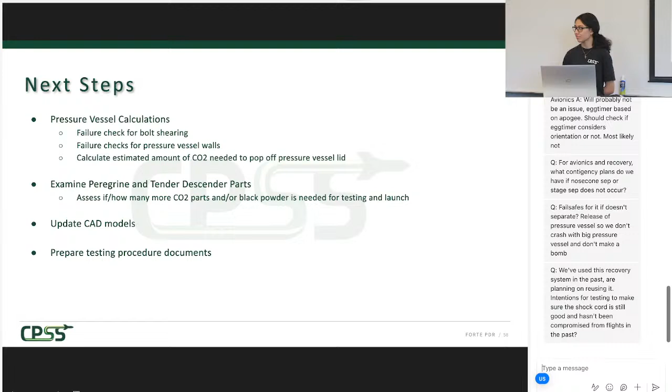Yeah, the questions and comments were about the state of our shock cord and recovery stuff and making sure that's still good, and also what the shelf life of the cords may be. And we believe that it's still within that shelf life, but if not, we can always buy more because it's relatively cheap compared to other stuff on the bill of materials. Okay, good. So next is separations.

So, hello, I'm Tianna, and I'm in charge of stage separation. I'll be walking you through the design process. Our main objective is to design a mechanism that separates the two stages in a reliable and controlled manner. For that reason, we decided that an explosive release would be the most reliable and realistic or feasible solution, with shear pins

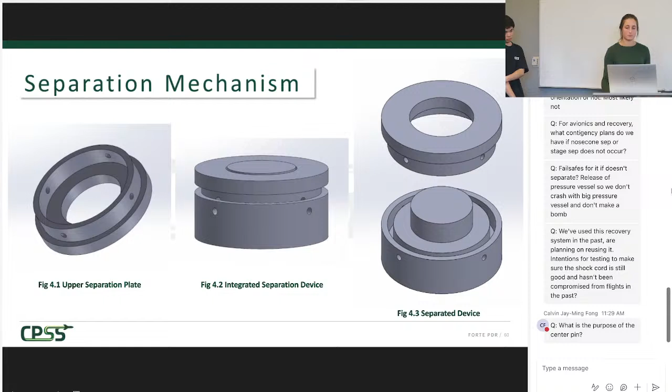Any more questions? And on to avionics. All right, I'm Jack Ryan, the avionics lead, and this is Spundin, who is the software lead for avionics as well. And yeah, we'll be talking about our avionics system.

So our main PCB that is going on the two-stage rocket will be the telemetry operations manager, or TOM for short. And TOM is basically meant to be a one-stop shop for all of your avionics needs. So it has all of your basic avionics sensors like your altimeters, IMUs, GPS, and it's meant to handle all of the readings, the filtering that you need to do, as well as communicate that down to ground station.

And it has a lot of power regulation on board too, so that you can provide it with a wide range of voltages. You can use pretty much any reasonable battery and it should be able to run. And it also has an additional third microcontroller that is left intentionally as a blank canvas to do whatever else you need it to do. And it has a lot of GPIO so that whatever mission it's needed on, it can accomplish that. So here's a little black box diagram of TOM.

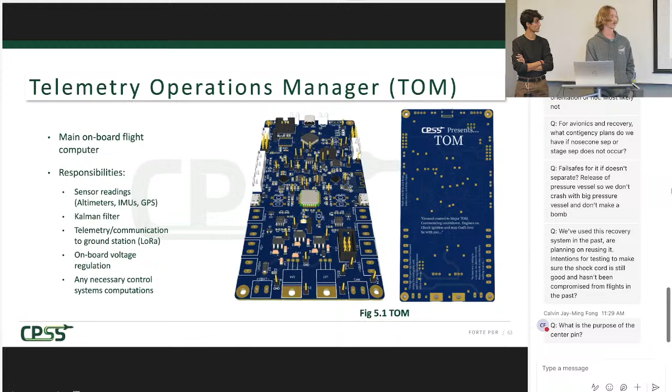Additionally, as you might be able to see on the board here, along the side we have a lot of connectors. We routed out a lot of the communication ports for the sensor microcontroller so that, in case the sensor fails or something on board doesn't work, we can always plug in another breakout board or an off-the-shelf component to replace it. So there's some I2C and UART ports available for backups.

And then in terms of sensor redundancies, we have, as I mentioned, 3 IMUs and 3 altimeters. The reason we like 3 is that we can take the median value rather than the average, because if we take the average value and then one of them fails and, for instance, starts reading zeros, then we divide our actual value by half. This was suggested last year to us at PDR, so we decided to run with it this year as well. And these values can be fed into a Kalman filter for increased accuracy.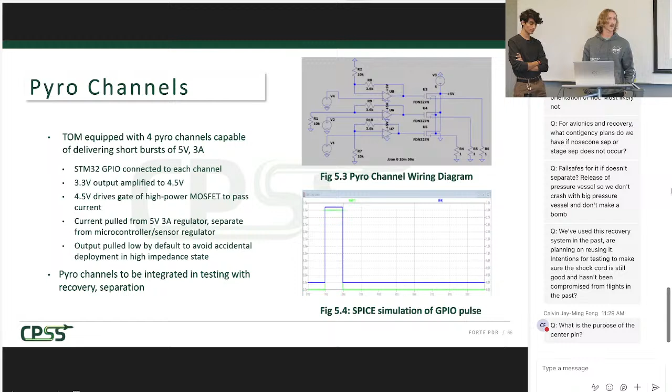So in terms of software, we're aiming for two major milestones. Milestone 1 is just our minimum viable product running on Tom. ESP32s support programming via the basic Arduino framework. So the goal will just be to get the onboard IMUs, altimeters, and the GPS functioning. And in the event that an SMD we expected to work isn't working, we'll use Tom's GPIO pins to drive breakout boards. We're aiming to transmit from the onboard LoRa module. Also, if our SMD components have some problems, we'll be able to use GPIO pins to transmit. And then the ground station is just receiving via a Raspberry Pi using a basic script printing out to a shell.

Milestone 2 is going to be more of a polished Zephyr system. As soon as we achieve milestone 1 and secure our minimum viable product for launch, we'll aim to move over to the Zephyr real-time operating system and clean things up a little bit. We'll find analogous libraries to the Arduino libraries that we use to run the basic sensors on the ESPs running the Arduino framework. Then we'll take other polishing steps, like accounting for data packetization, quality of service, and making this more of a product that we can take into future years. And then we'll start using OpenMCT or Foxglove Studio or some alternative to display ground station data in a more polished way.

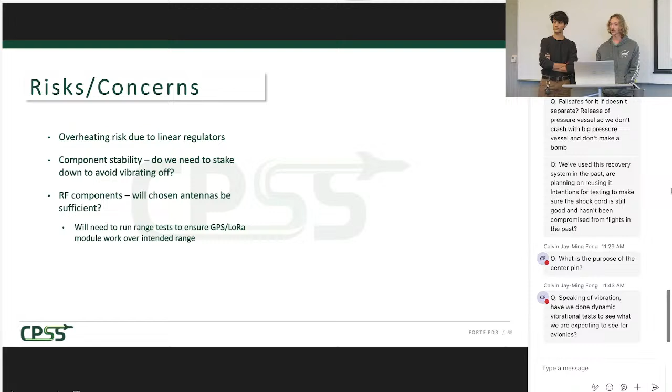Matthew. Speaking of vibration, it's more of a question for the structures team. Have you done any kind of dynamic analysis of the rocket and the dynamic environment that it's going to see, like what vibrational load you're going to be expecting, so the avionics team can design for that, or is that something you're going to look into? We did find out that we have a vibe table that we didn't know about, so we might try and see if we can get that working, or probably contact someone in the ME department if they have a vibe table. Yeah. That would be good.

One thing I forgot to mention as well is that the telemetry microcontroller is also equipped with Bluetooth. It's an ESP32, so it's meant for Bluetooth. It has an onboard 2.4 gigahertz antenna, and so if we need to communicate between the 2 stages, that's one way that we can do it without passing wires through something that's going to be separated.

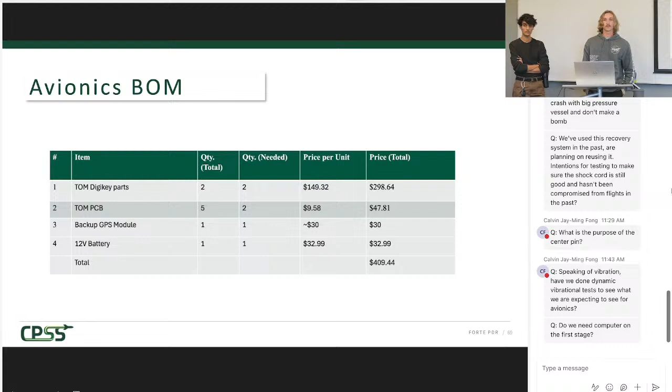I'd say more than half an hour. If it takes you a while to get a lock on the GPS on the ground, you might want an hour or two. I think he said half hour on the launch pad. Oh, sure, yeah. I think that's also what FAR gives you. Yes. All right. Okay, that's it from us.

Next up, we have testing. Hello, my name is Auriel. Because we're doing so many tests this year, we wanted to group them in a separate section at the end, so we can say what tests each subsystem is going to do. I'm going to be working very closely with each subsystem to develop their tests and then perform them, so they have a little bit more help, and so we can develop more procedures and get them checked.

So we have our composites testing. Our current composites are out of spec donated material, so we need to verify that these materials are going to withstand the loads during flight. We did this last year with our material after the freezer broke down, and it turns out they did not withstand the stresses anymore. So we had to get new material, which is why we now have out of spec material, but it is new and still works for us since those tolerances are so tight for companies and industry.

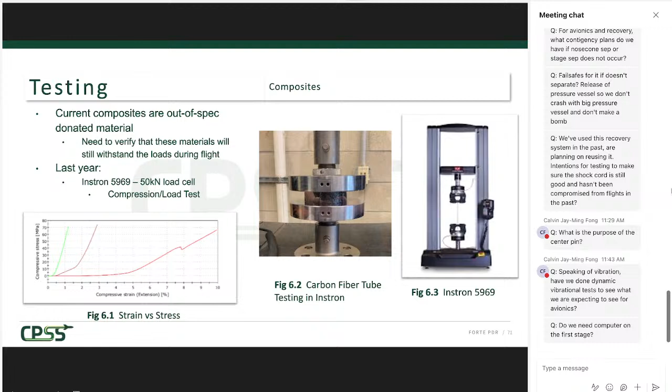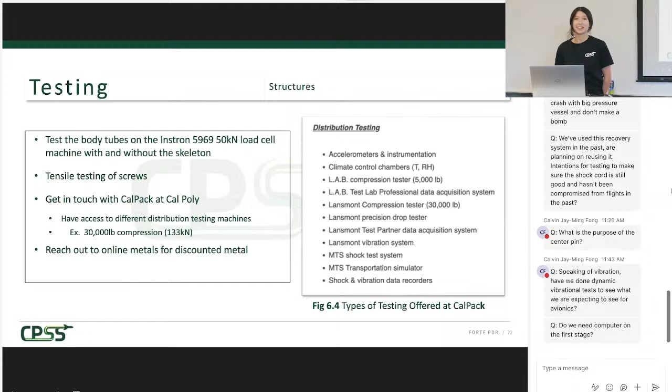We want to combine with the avionics system so that they're going to test their system while we're testing our system. This is going to be probably right near when we're going to launch, but probably like a month in advance, hopefully. So most of our stuff's going to be set up and manufactured at this point. It's really just going to be a big test of multiple systems.

And then we're also going to do tender descender testing, which is just ensuring that the quick links of the tender descenders successfully detach from the housing. This can also be used to teach other younger students, since a lot of us have done this before. But it's a cool test to watch, and it's just checking to make sure our tender descenders are still in good condition.

And so for our next steps, obviously we want to do safety procedures, and then brief everyone on black powder, because that's specific documentation that you need to learn.

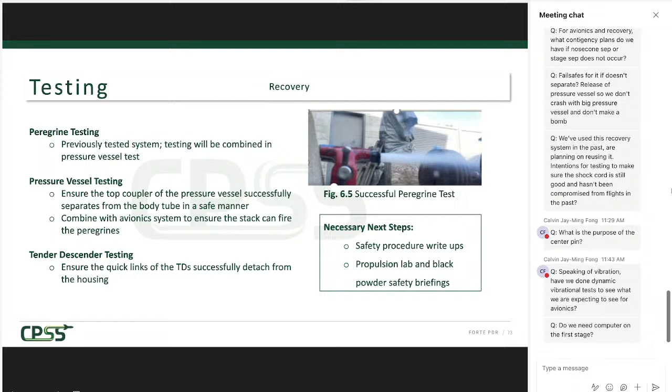So for separation, this is our biggest test and probably our most dangerous test for our 2-stage, because it's basically a ring of black powder. And we've never tested this much black powder probably in a while. I don't know about before COVID, but for our group, yeah. And we need to basically make sure that the separation system separates and does not fail. And we can't test our hot staging as our redundancy, because that's just going to be the motor, but we can test black powder easily in our Cal Poly propulsion lab.

So the test right now, what I'm thinking is just finding some way to secure the transition piece on the ground. That's going to be bolted into the separation with shear pins, and then all the pieces are going to be in there with the black powder. And then if the top just pops off, then we're good, successfully separated. Figuring out how to apply loads to that will also be something that we're looking into in the future. Yeah.

Okay. So for some next steps, we have to obtain more black powder if we want to make a ring of black powder. Cody has previously offered to get this for us somehow. But we're gonna work with him and Dr. DeTuris to ensure a safe test. Yeah.

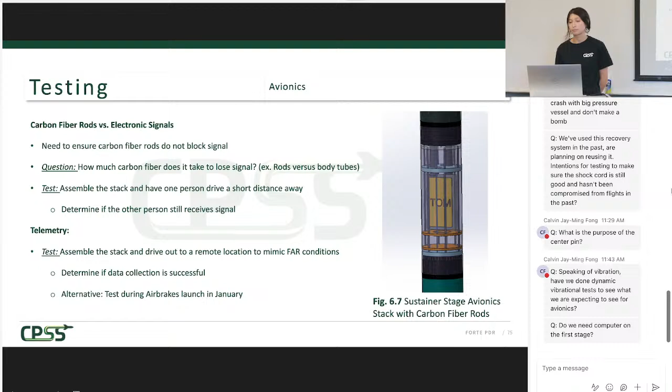So budgets, aerodynamics. When we were allotting the budget, I did not account for the fact that we did not have the casing for the motor for the upper one. So that budget was only the grain. The casing alone is another 1,000. That's what's causing that to be up. We're not exactly sure how to get around that, other than just sourcing from somewhere else who's not making us pay 1,000. Are you sure in the closet of curiosities, there's not any other motors? We checked, and apparently there was one that was the right size, but it was cut off. I don't know why that would have been done, but it is not usable in that state.

We were also looking for the little caps, because that would save us a couple $100. Those alone are like a couple hundred. Couldn't find any of those either. Couple in there that have been melted through. So the only one left is the M1939 one that I would like to reuse, so we don't have to spend another 1,000 on one of those. We thought about that also. They look like they could be made, but I do not know how much we want to rely on handmade things for that, because that is the big explosive, most dangerous thing. And if we don't make that right, that sounds dangerous. But we can look into that depending on how this cost goes. That is a good thing to consider.

That is external pressure, right? It comes on the inside of your body too. I'm also not aerodynamics at all. So my thought is that you have a hole, right? You cut in the body tube that equalizes the pressure. But I don't know, you'd have to have your aerodynamics people looking at what that is inside the body. Yes, we will consider that. That is a good point. Did not think about that.

Know more about that? Okay. Well, are you the big aerodynamics guy? Yeah. Well, Will, are you with us? Which Will? Hey. Oh. Yeah, what question are you guys talking about?